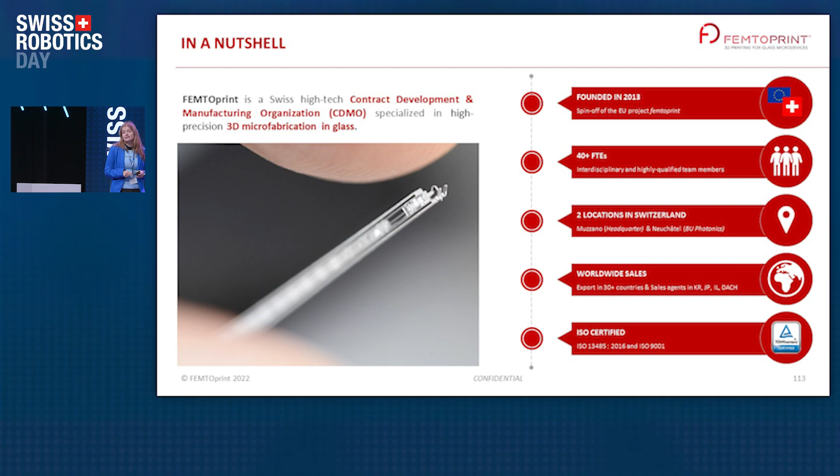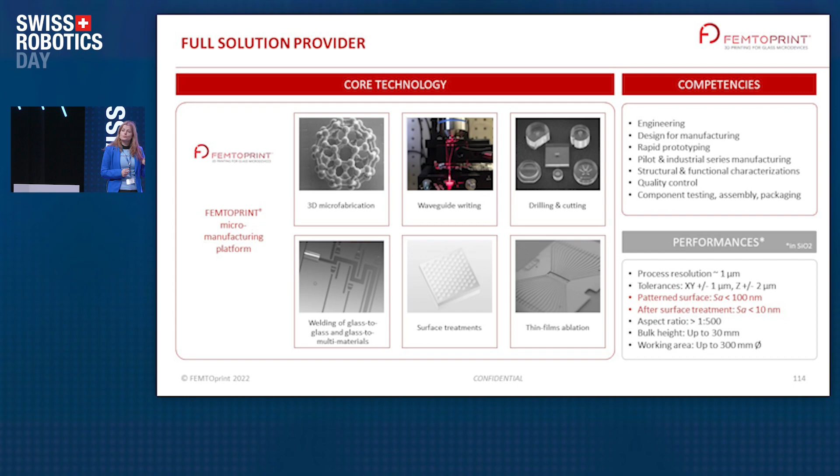So I'm here to represent FEMTOprint. FEMTOprint is a company that is building micro devices in glass. They have a lot of innovative technologies that allow them to create new products in a very rapid way, to do fast prototyping, and to bring products very fast to the market.

So that's great, but of course when it comes to automation, that's a problem, because they have a lot of different products, small production volumes, and they are putting new products in the market all the time.

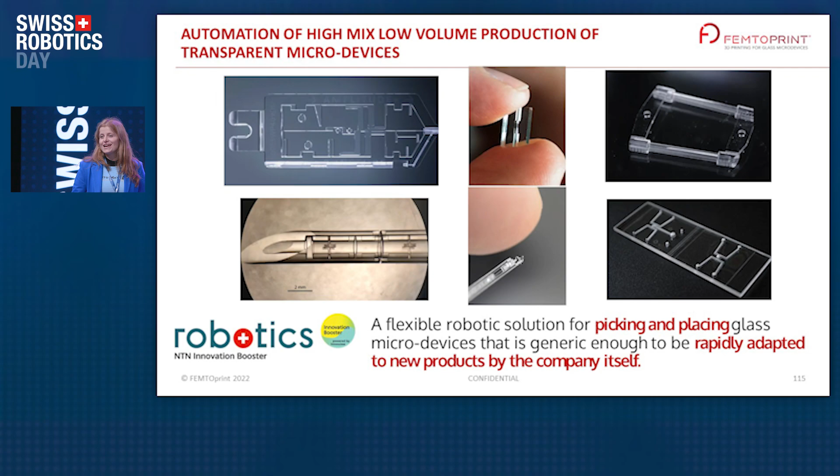So how can they really find a solution to automate these tasks with lower added value, but still be flexible enough? The goal of this project was to create a solution they can reprogram themselves, so that a non-robotics expert can very rapidly adapt the automation solution to their needs.

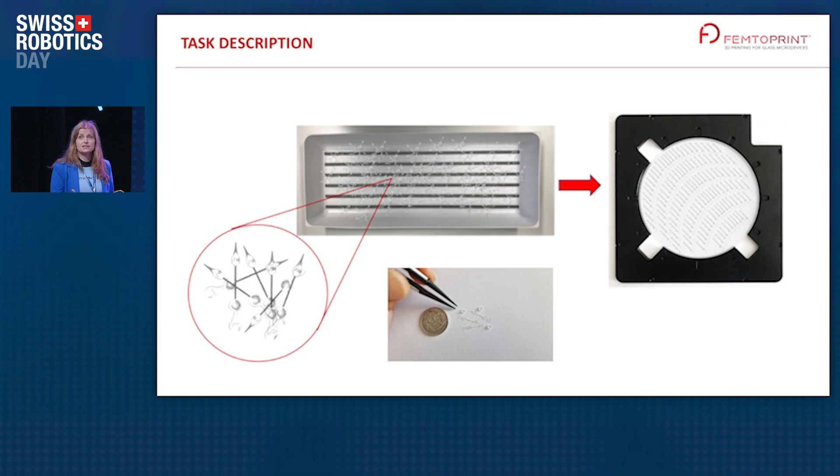So what we decided to do is take a learning-from-demonstration approach. It means the worker can use the regular tool he's using to show the robot what he needs to do. But for that, we also need vision - we need to localize the pieces, and we need a robust gripping system.

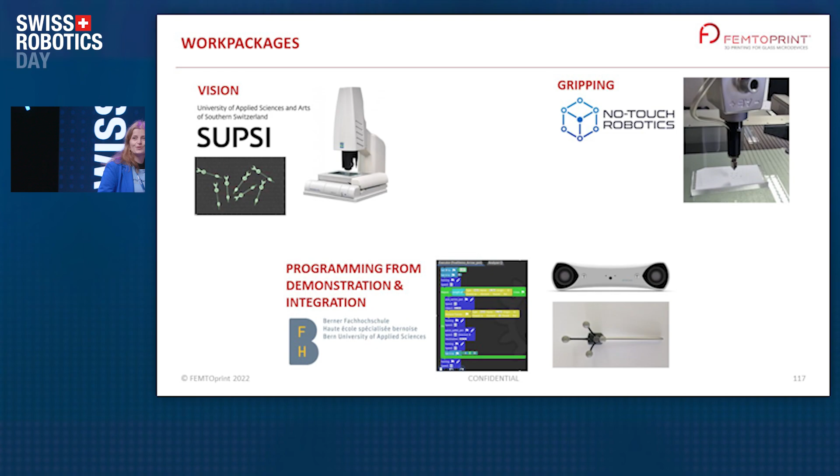And that's why we teamed up with No-Touch Robotics. It's a startup focusing on micro-gripping and handling, working with different technologies such as contactless manipulation using acoustic levitation, adhesion gripper using liquid surface tension, and closed-loop vacuum gripper, which is the technology we used in this project. They can handle a lot of different types of products with that.

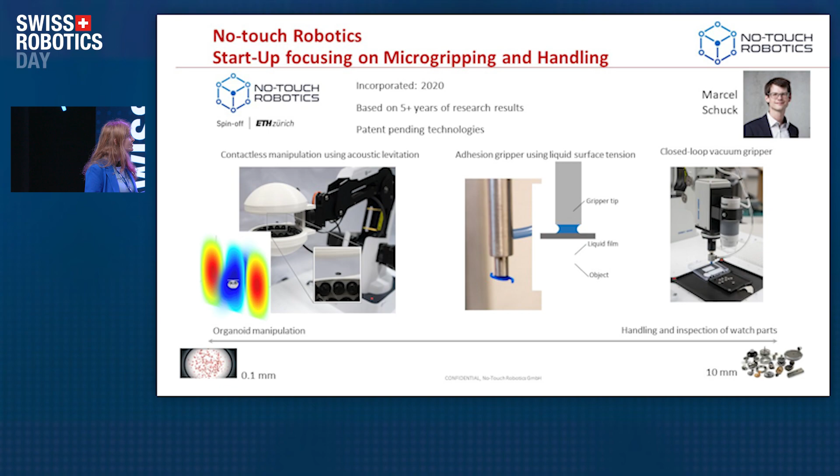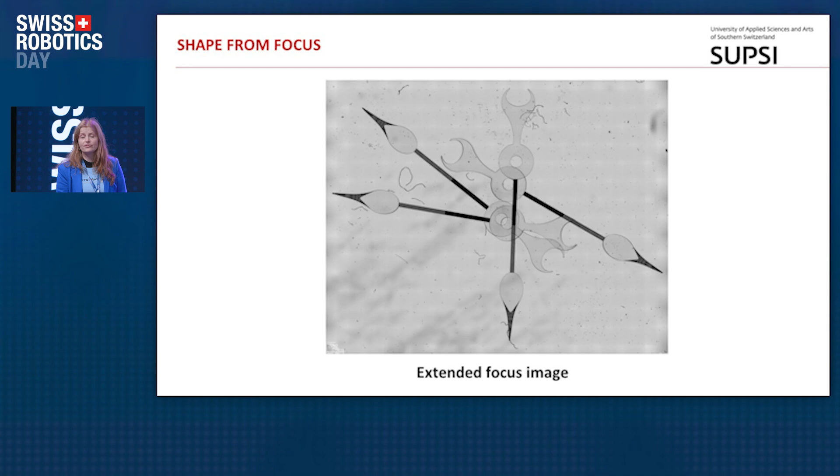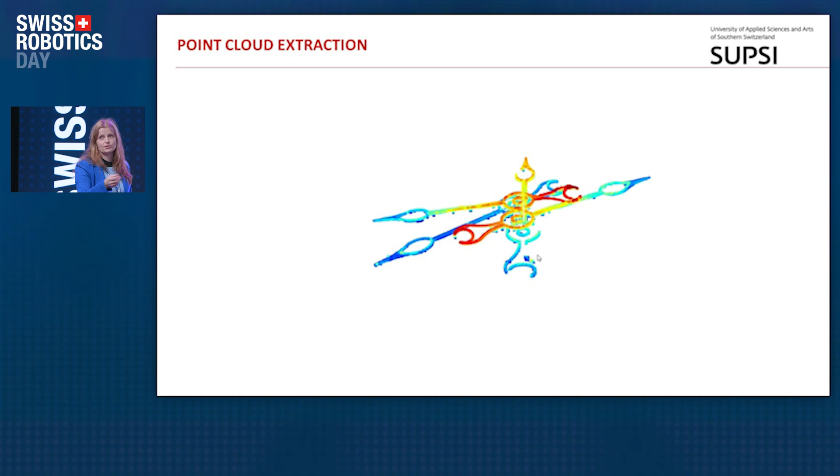For the vision, we had a micro-view microscope - that's the technology they already had at FEMTOprint, and the goal was to use what they already have. With that, we can change the focal point of the image, and with this information we can get information about the depth. So we combine template matching to localize the pieces and use this depth information to create a point cloud, to better know which pieces to take first - the pieces on top.

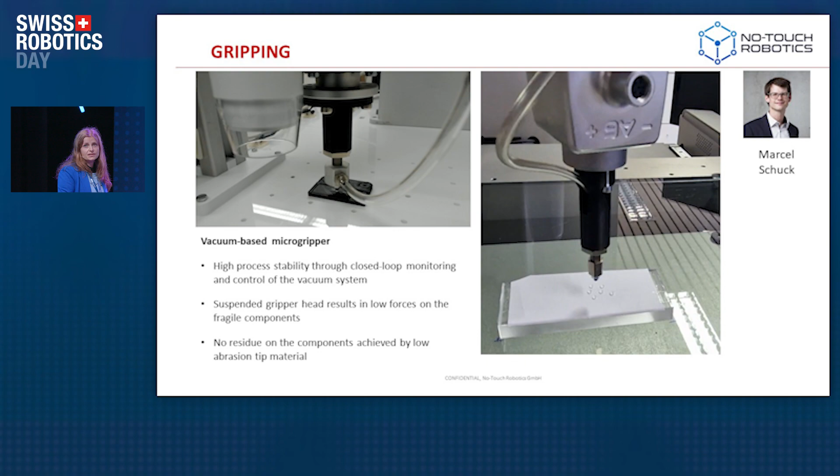For the gripping, we used a closed-loop micro-gripper, and with this closed-loop we had the needed stability, because since the pieces are so small, they tend to move when we place them. We could use low forces, and there was no residue on the pieces.

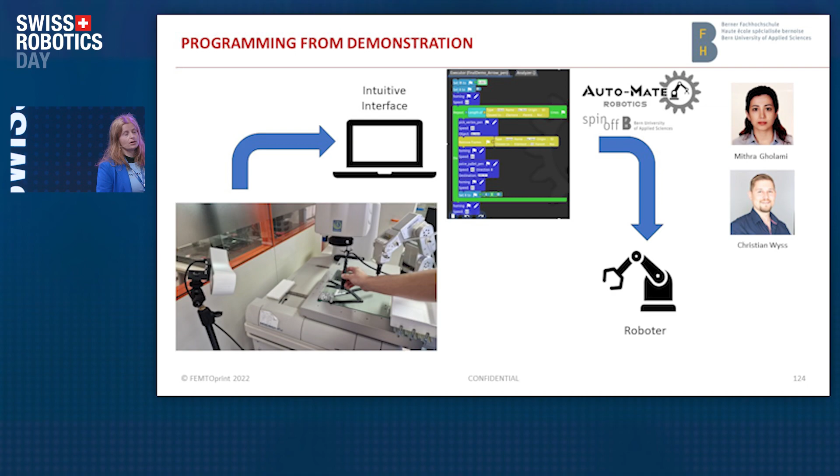Then we used a network-sync camera and a pen with a tracker to get a setup so that we can record what the operator is doing. We used the intuitive interface developed by the spin-off Auto-Mate Robotics to manage the points and define the tasks, and then we filter it and send it to the robots.

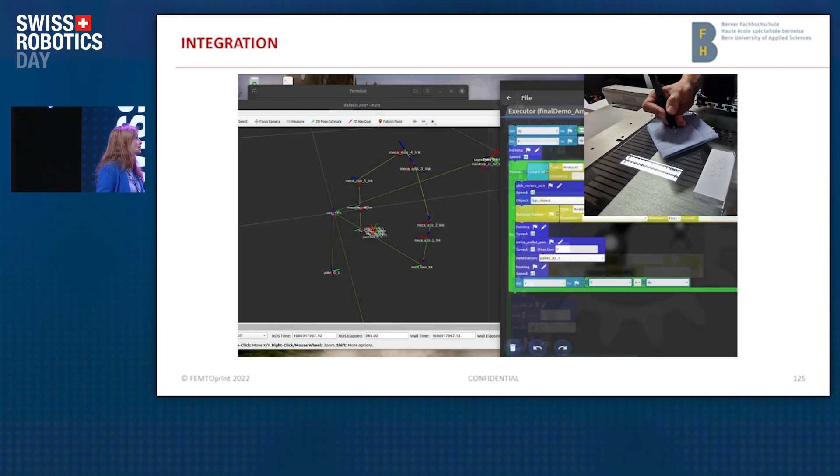And with all these parts, we were able to have a system where, as you see here in the corner, a user can really show the trajectory. In this case it's point-to-point, but it could be a whole trajectory. We record all the points, and then we create a program that we send to the robot so that the robot can execute the task.

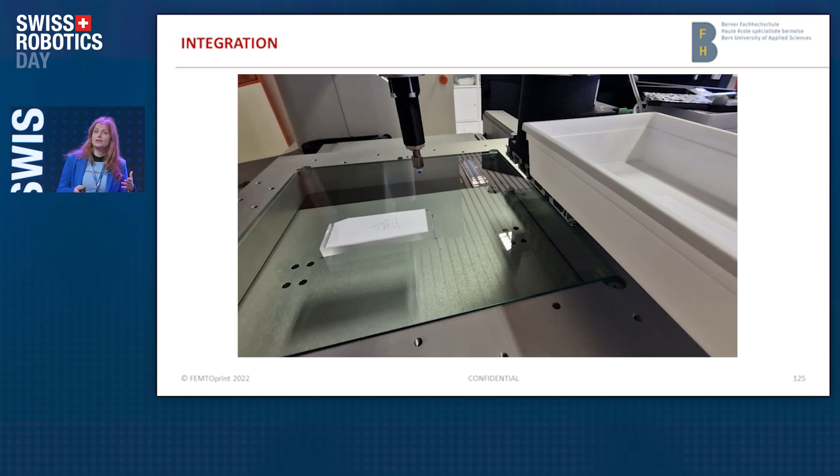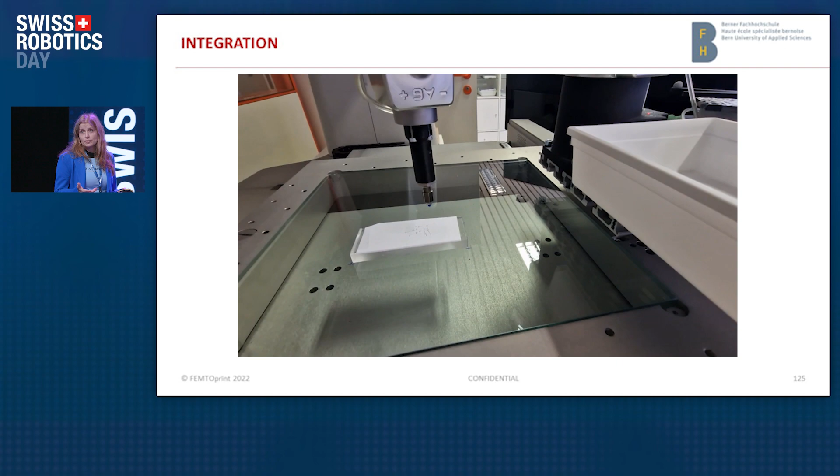Even though the pieces are really small, we could very rapidly program this task - it took us less than half a day to reprogram the whole system in a reliable way. So of course we still need improvement, but the company was very happy with that.